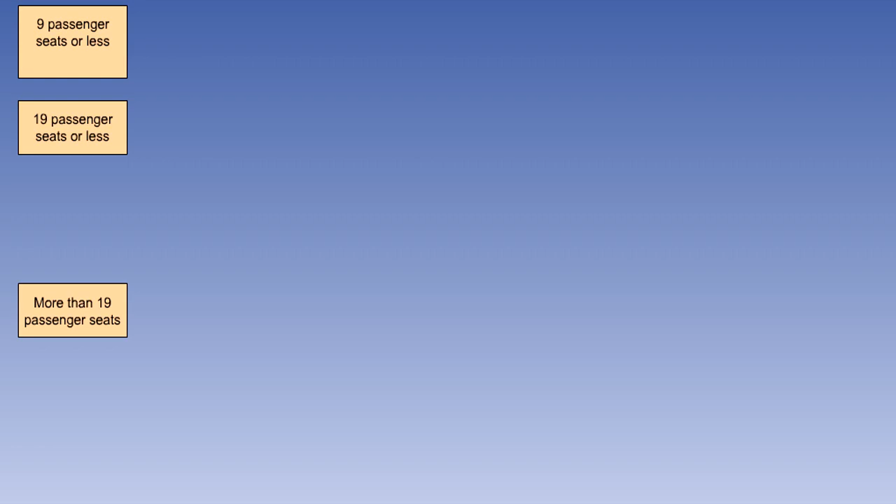With an approved passenger seating configuration of 9 or less seats, the aeroplane must not be operated at night unless it is provided with a source of general cabin illumination to facilitate evacuation of the aeroplane. This may use normal internal lighting systems, provided they are capable of remaining operative after the aeroplane's battery has been switched off.

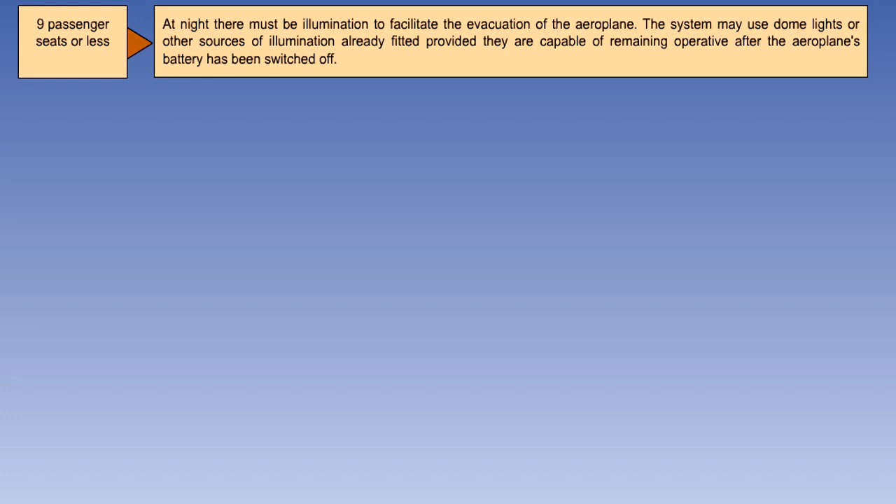All aeroplanes with an approved passenger configuration of more than 9 seats must have an emergency lighting system with an independent power supply. For aeroplanes with an approved passenger configuration of 19 seats or less, but more than 9, which are not certified to EASA CS23 or CS25, the independent emergency lighting system must include general cabin illumination.

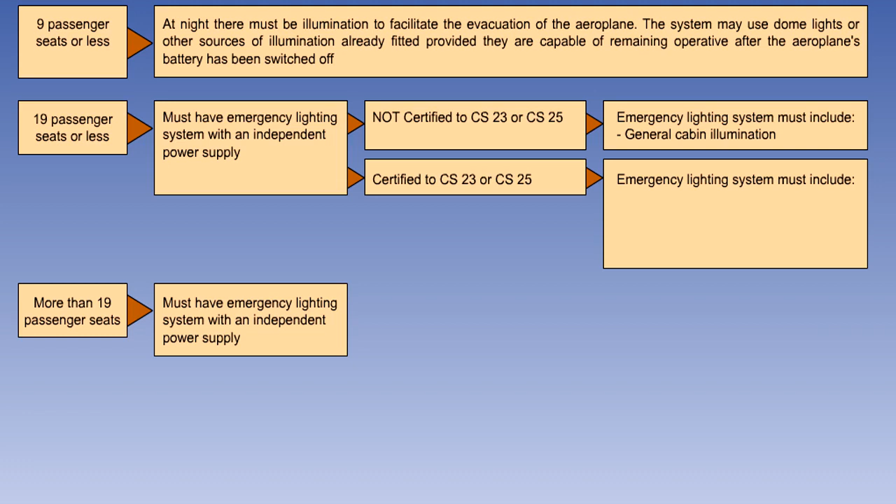For aeroplanes with an approved passenger configuration of 19 seats or less, but more than 9, which are certified to EASA CS23 or CS25, the independent emergency lighting system must include general cabin illumination, internal lighting in emergency exit areas, and illuminated emergency exit markings and location signs.

Aeroplanes with an approved passenger configuration of more than 19 passenger seats must have an independent emergency lighting system which includes general cabin illumination, internal lighting in floor-level emergency exit areas, illuminated emergency exit markings and location signs, floor proximity emergency escape path markings in the passenger compartment, and exterior emergency lighting at all passenger emergency exits.

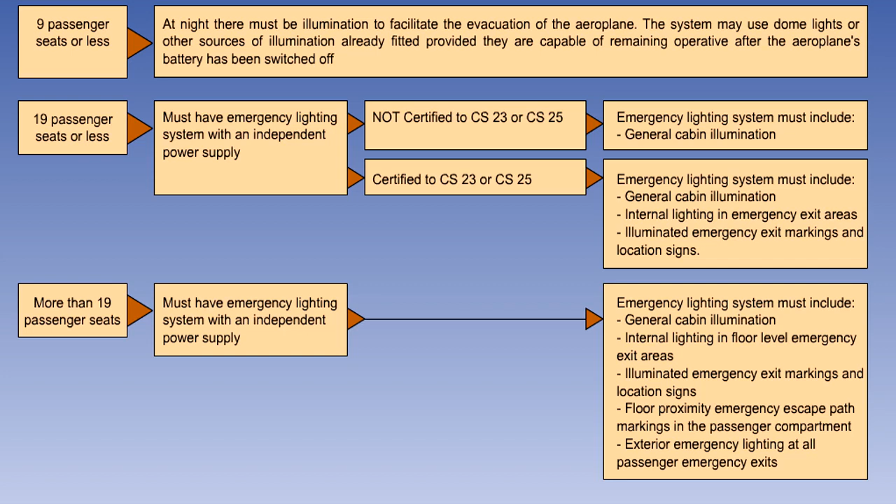We will now look in greater detail at the requirements for aeroplanes with more than 19 passenger seats. By doing this, the requirements for the other groups will also be covered.

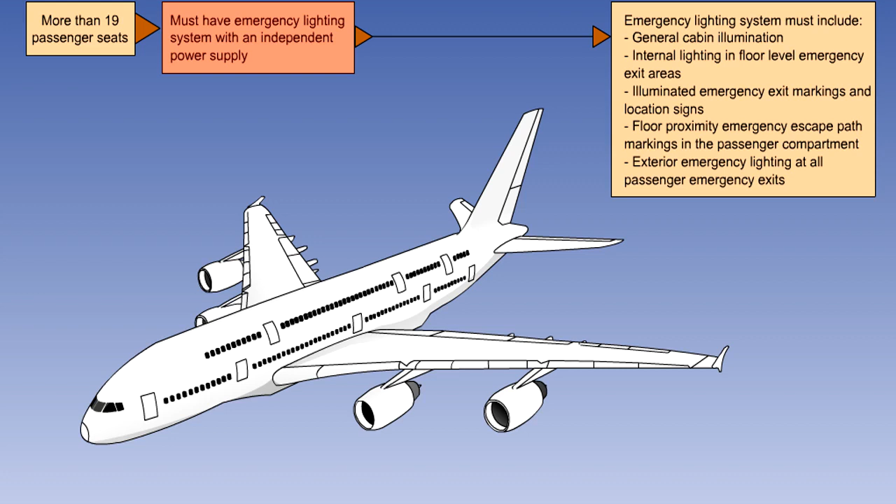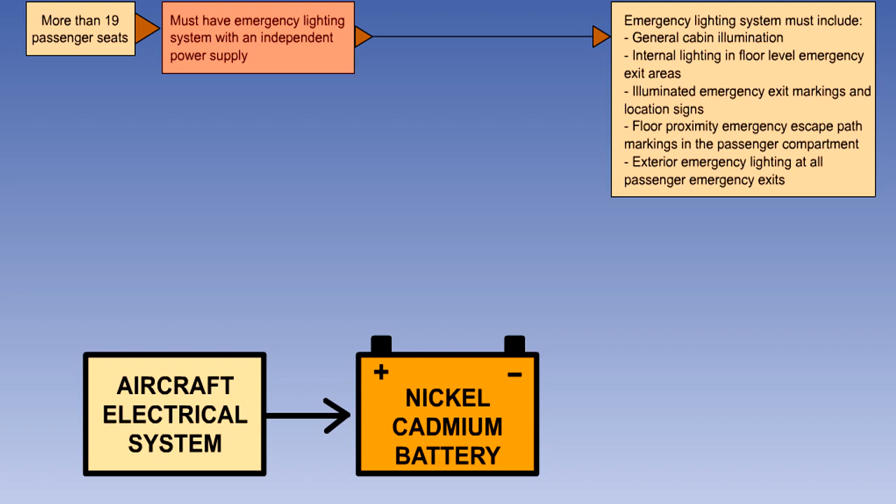There must be an independent emergency lighting system. To achieve this, the emergency lights are normally battery operated. The batteries are usually of the nickel-cadmium type. They are normally kept fully charged by the aeroplane's electrical system. The batteries must be able to maintain the emergency lights at full brightness for a minimum of 10 minutes.

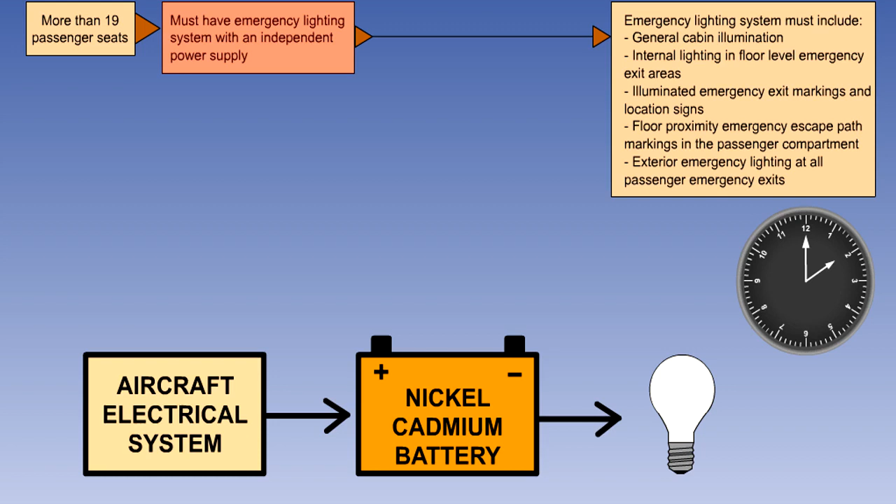General cabin illumination may be provided by white lights in the ceiling along the aisles and at the emergency exit locations. There may also be white lights located low down on the sides of the passenger seats to illuminate the escape paths.

Exit location signs must have red letters on a white, electrically illuminated or self-illuminated background. The emergency exit signs must be repeated at low level.

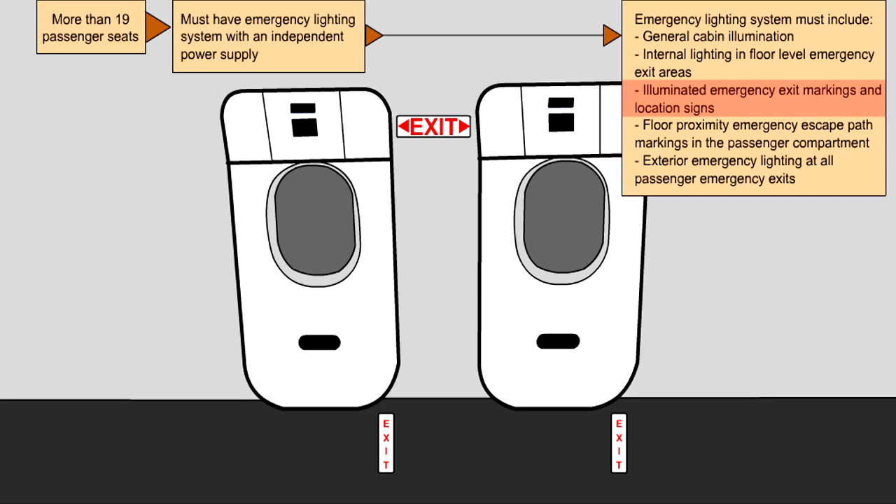There must be floor proximity markings to provide emergency evacuation guidance for passengers when all sources of illumination more than 1.2 meters or 4 feet above the cabin aisle floor are totally obscured. These may consist of locator lights on the floor down the aisles, or a continuous strip of light along the aisle.

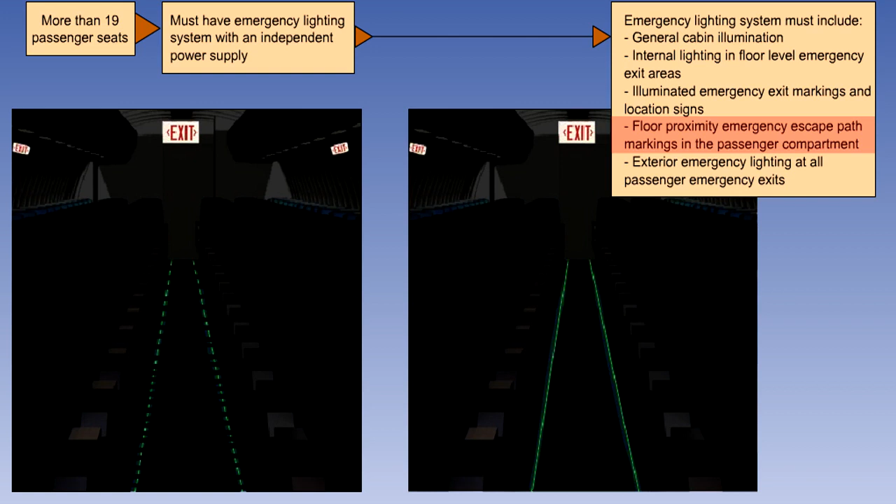Finally, there must be exterior lighting at all emergency exits, such that the escape route from the exit to the point on the ground where the evacuee will take his first step is illuminated.

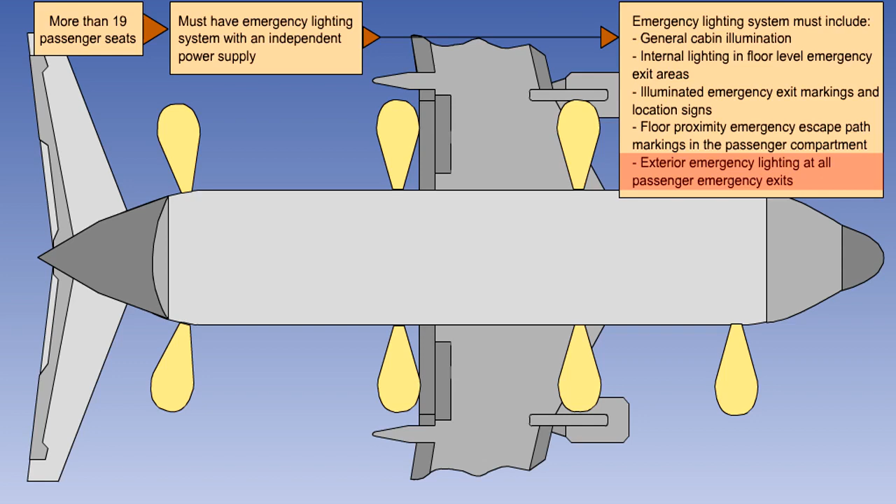The emergency lighting system is controlled by 2 switches: one on the flight deck, and the other in the passenger cabin adjacent to a cabin crew member station.

The flight deck switch has 3 positions: off, armed and on. It is guarded to the armed position. The switch is in the guarded arm position for all normal flight operations.

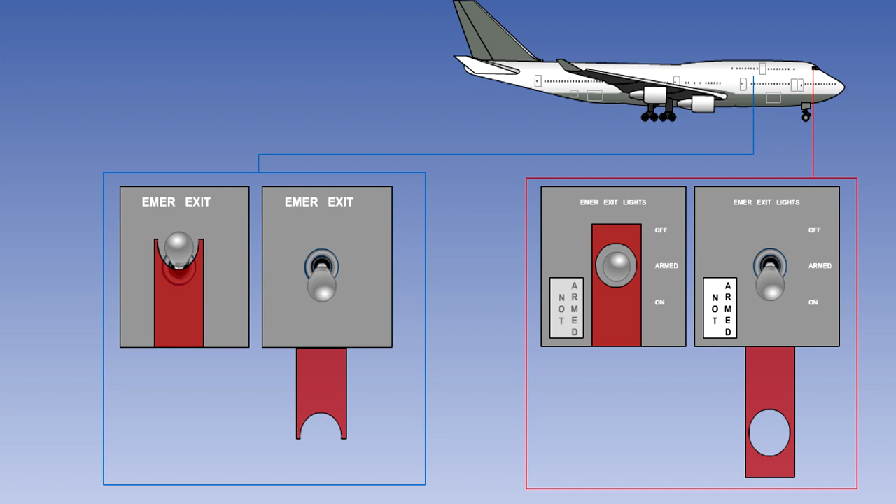Adjacent to the flight deck switch, there is a warning light which is captioned "Not Armed." This light is supplied from the normal aircraft electrical power supply and will come on at any time the aircraft electrical power supply is on, and the emergency lights are anything other than armed.

The passenger cabin switch has 2 positions, normal and on. It is usually in the normal position.

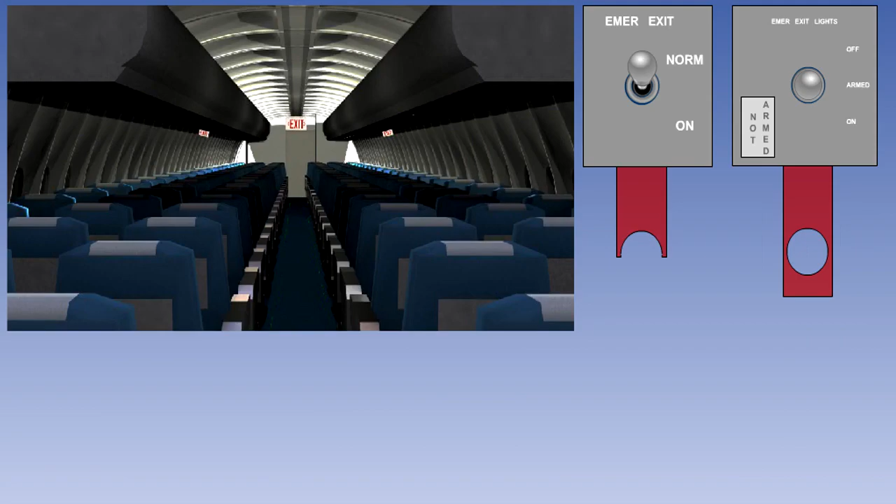With the flight deck switch in the arm position and the cabin switch in the normal position, the emergency light control circuit is armed. It is monitoring the aircraft's essential electrical system, and provided this system is normal, the emergency lights will be extinguished.

If the aircraft's essential electrical power system fails, the emergency lights will illuminate automatically.

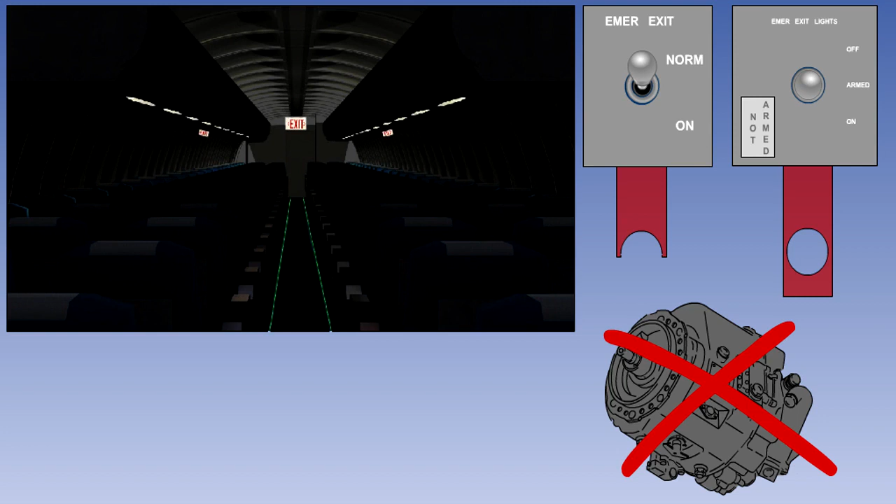If the flight deck switch is moved to on, the emergency lights will come on. And because the system is no longer armed, the not armed light will illuminate.

The pilot switch off position is used when shutting down the aircraft. With the switch in this position, the emergency lights will not automatically come on when electrical power is removed. With the pilot switch in the off position, the not armed light will be lit until electrical power is removed.

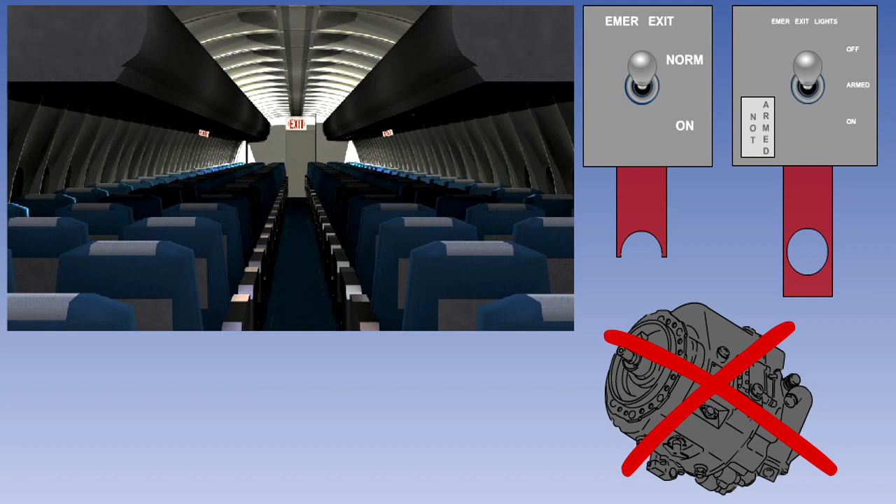The emergency lighting system may be switched on from the cabin switch by moving it from normal to on. Operation of the cabin switch to on will turn on the emergency lights no matter what position the flight deck switch is in.

The selection of emergency lights on from the passenger cabin will illuminate the not armed light on the flight deck.

That is the end of the lesson. Remember that the emergency lighting system has an independent power supply, which must be able to maintain the emergency lights at full power for a minimum of 10 minutes.

The lights can be armed to come on automatically in the event of an essential electrical system failure, or they can be switched on manually from either the flight deck or the cabin. Emergency lights illuminate the emergency escape paths both inside and outside the aircraft.